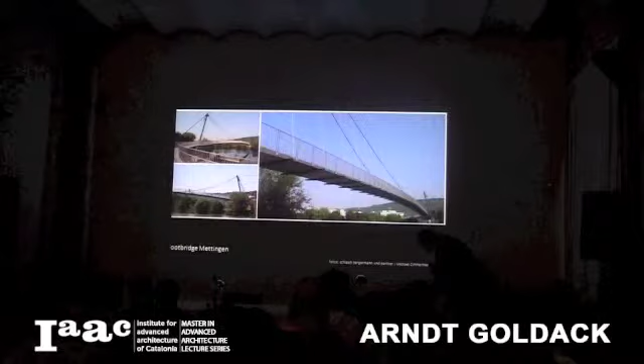And so the office of Schlaich Bergermann works a lot with footbridges and pedestrian bridges. On the other hand, they have very good experience with lightweight roofs, membrane roofs. You can see one of the earliest membrane roofs which has been built. This is the Gottlieb Daimler Stadium in Stuttgart. This is, let's say, the prototype of the membrane roofs.

And what you can see here is a very light structure with membrane here. You have a cable ring here, and these are not girders, these are only cables here, and you have a big compression ring here. In terms of structural engineering, you can say it works like a spoke wheel, more or less, but actually the point is that this roof is comparably light and easy to construct compared to other large span or wide span roofs for stadia.

And also lightweight structure, this is a structure in Stuttgart. This is a tower, panoramic tower in Stuttgart. And actually you can see that it is a kind of cable net structure here outside, where the stair is attached to this cable net structure. And to get the cable net structure to work here, because it's all in tension, you have to have here this post inside for the compression. So this is also something I would have in mind when I talk about lightweight structures.

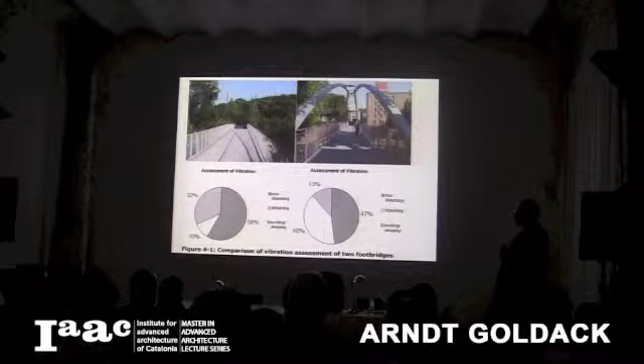And one of my explanations is that this bridge, I would say this bridge gives you a promise of stability. And the people are worried about this vibration here on this bridge. And here, okay, they say this is a lightweight bridge, it's slacky or wobbling, and so actually they don't worry about the problem here.

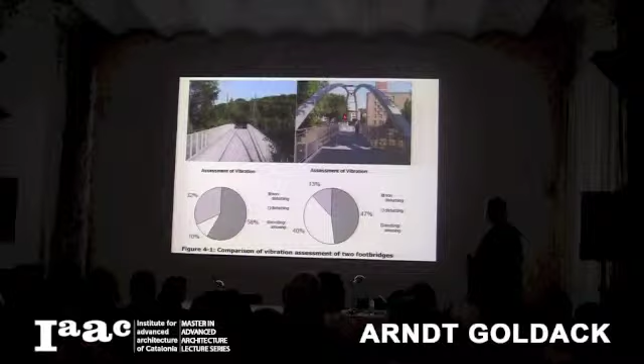And in this case, I will show you a video. You can see what happens here. This is a video. You see these four guys, they are walking in synchronous, so like in a stadium roof, in the stand, they are almost marching, and you can see here the amplitudes. Only 4 persons, no? But they have a trick. They have a metronome, and they know the natural frequency of the bridge.

And now look at the lady here. She tries hard to walk, and now she gets some problems here to walk. And now the bridge starts again to vibrate. She wanted to leave very fast. So this is a problem. It's structural engineering that you have to think in advance of this problem and think about comfort problems and everything like that.

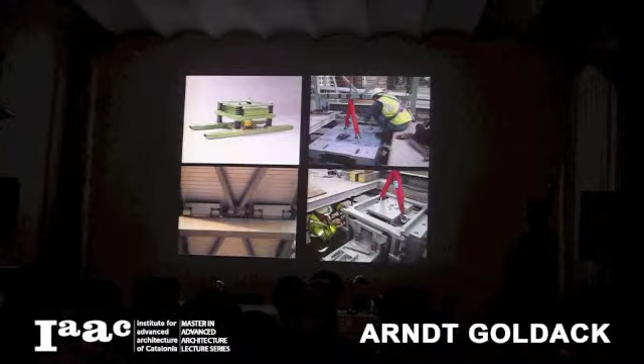So, very nice project. And if you don't want to have this large vibration, you have to think about damping. And damping is almost done by these tuned mass dampers. And you can see this is a very technical issue. You have some mass, you have a spring, and you have a dashpot. And actually, if you have done your design well, you find some place where to attach all these boxes.

And this is an example from the Millennium Bridge, where they had to put all these huge dampers here inside. And sometimes you can hide this, and sometimes you have the problem that you cannot hide it. And then actually the discussion with architects is to show the dampers or not to show the dampers. But in any case, it's a problem. If you don't take these vibration issues seriously from the early design, then you always get into problems.

And actually the worst scenario is that at least you will get a call by the owner and he's not happy with this bridge because of the vibrations. And afterwards doing this repair work is a really bad thing. So actually that's why we at Schlaich Bergermann used to take all the thoughts about dynamics and vibrations into the early design stages. That's a very important aspect.

I want to show you two projects now, a little bit more in detail. This first one is Sassnitz footbridge. This is at the Baltic Sea in the northeast of Germany, and you can see this nice footbridge here. And this is a cable stayed structure where you have here cables and the mast. And actually, in this case, we have to think about this vortex shedding, the wind-induced vibration, and also pedestrian-induced vibration.

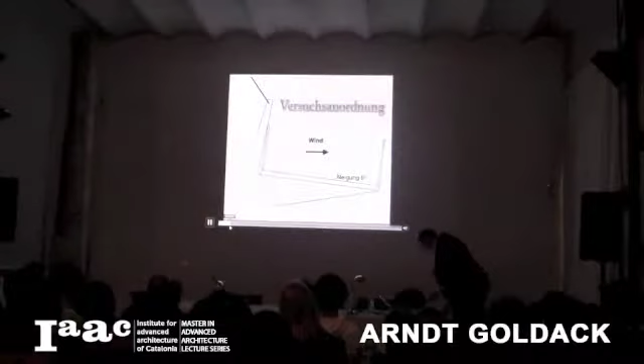Oh, sorry, I just want to show you the video. So, once again. So this is the old section where we have done the design; from the structural point of view, this is the section how it looks, what we need, steel plates and everything. And this is what the wind engineer recommended. He just added a small plate to the cross section, and the effect is tremendous.

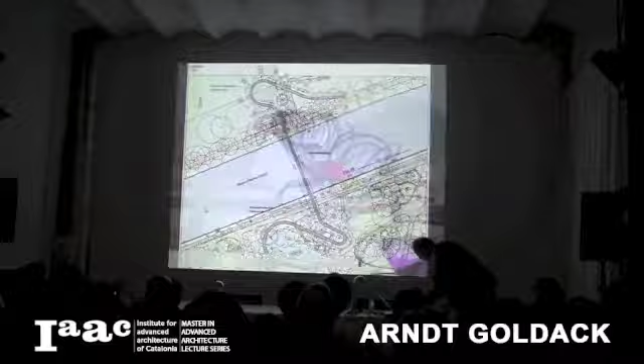Sorry, I'm a little bit here. Sorry. Once again.

So now, cross section again. The design from the structural engineer and the attached plates from the wind engineer. And now we put this model in the wind tunnel, and you can see here the rotor blades which generate the wind, and here is the old cross section, the new one with the plate, and now we are increasing the wind speed at different steps, step 4, and you see the old one starts already to vibrate.

And this is a full scaled model, so actually what you can see, this vibration is introduced by a wind which is a realistic wind at the sea. So actually just changing the cross section here has a tremendous influence on the stability of the cross section. And the next step is to check the dynamics of the pedestrians.

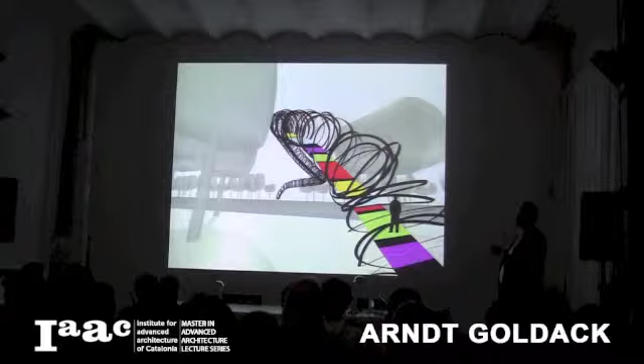You know, there's a toy with these spirals, and the question was if it's possible to build bridges with these toys. And the first idea looks like this sketch. So this is the idea of Tobias Rehberger, and now the question is how to make a structural concept for a pedestrian bridge. And we have a span of 70 meters.

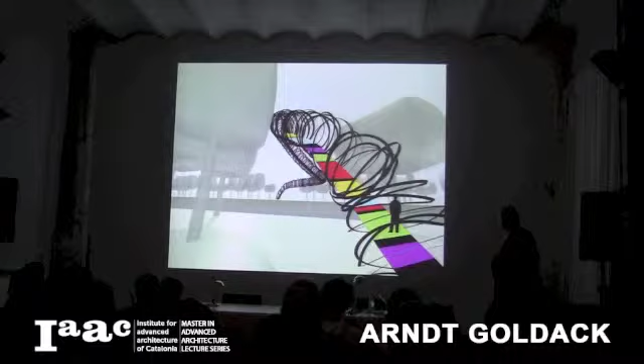And the question is now, if you take a standard beam bridge, you won't see anything here except the girder. You won't see these spirals here because of the structural height of the beams. So actually this is quite a challenging task for the structural engineers.

And what we decided to do is that we have here some special ramps, two of them, to get the necessary height to cross the canal here. You can see here is the canal, and the second ramp starts from here up to here, and this is a so-called stress-ribbon bridge.

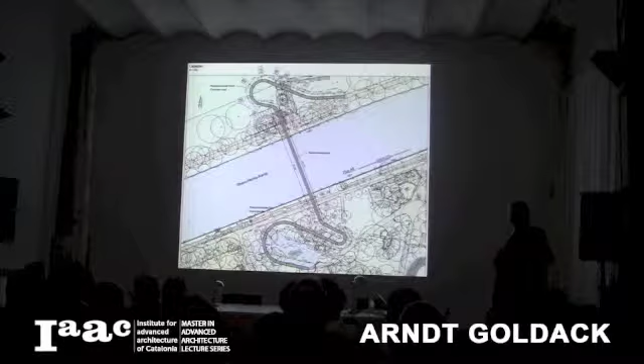The stress-ribbon bridge has a very big advantage. You can see it here in the cross-section. It works like a cable structure. You don't need a structural height for bending. You have here a cable with a certain sag, and you put the concrete panels on this cable-like structure, and we have a deviator here, and this cable runs from here to here, and here we have the backstay to anchor the tension force in the ground.

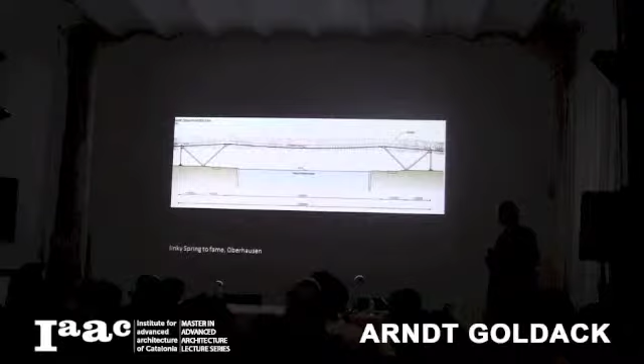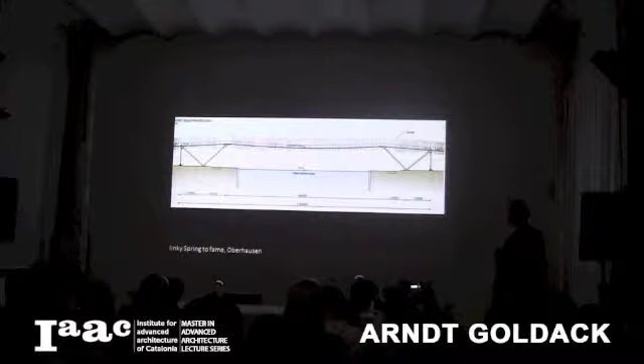And this is a very nice idea, because in this case you have only a structural height of 20 centimeters for a span of almost 66 meters. And you can see in these pictures now a very, very slender structure, but it's lively and it's lightweight. So actually we had to deal also with the dynamics and wind tunnel testing and everything.

And actually some pictures here. You see the spiral very nicely wrapped around the bridge, and no structural height or structural beam is disturbing the view on the spiral. And you see some impressive, nice photos here.

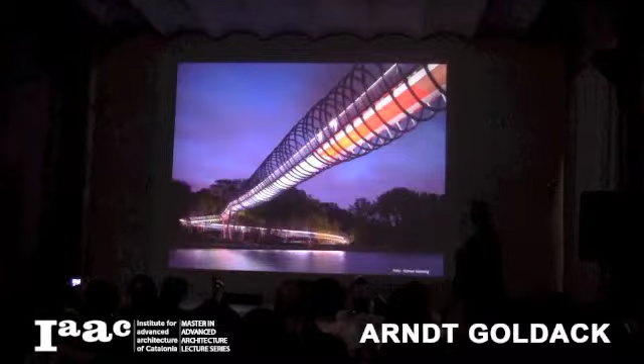And you can see here, this is the stress ribbon. We don't use cables for these bridges. We use a steel plate. This steel plate had a width of 60 centimeters and a height of, let's say, 30 or 80 millimeters. So it's a stress ribbon, not a cable. And these colors and illumination are very nice during nighttime.

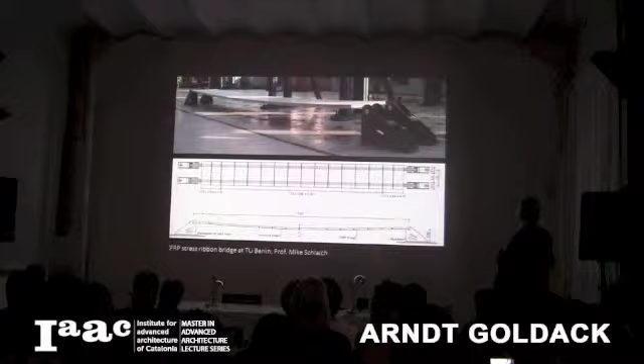And in our lab we have only a span of 13 meters built, but for our investigation it's very nice to do certain tests. And one of these tests is regarding pedestrian-induced vibrations. And look how this bridge started to vibrate. It's a real problem. If you want to have lighter footbridges, you have to think about these pedestrian-induced vibrations. And one of the solutions we try to find is semi-active or active vibration control.

And for this we have now attached, beyond all the posts and the hand railing and the carpets, some muscles here. What is a muscle? This is a special unit, I will show it later on, where we can introduce here at the defined measure some forces. And we have additionally now a central processing unit where we collect data from the bridge and give

commands to these muscles. And actually the idea of this muscle is that we have a valve here and some air pressure, and we can control the air pressure in this muscle here. And actually what happens if we inflate this muscle, it starts to contract and produces a tension force here. And what we do here is we introduce in the post some forces to act against the vibration.

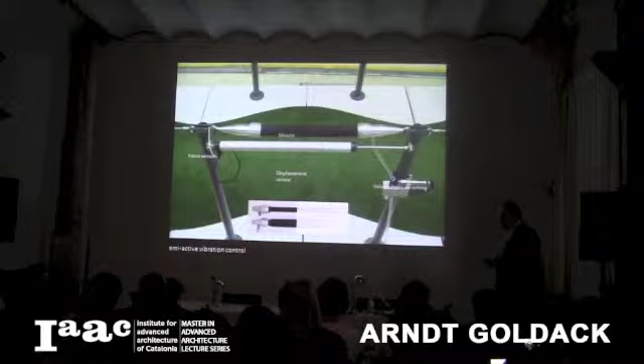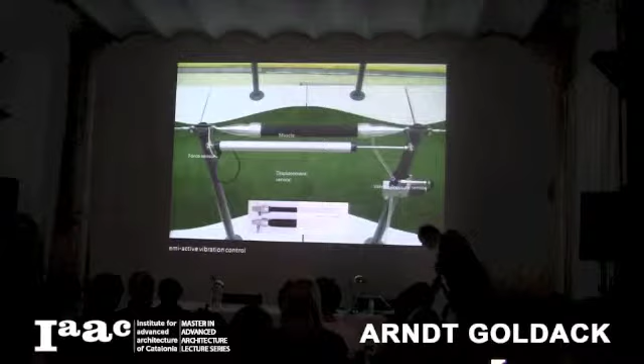And this is some stuff we need to attach also to measure the displacements and to know where the position of the muscles is. So all together we have this unit and the computer with all the algorithms. And what comes out is if you have a pedestrian walking on this small bridge, you see the bridge starts to vibrate. And now here the pedestrian leaves the bridge, then you have a free vibration, and it takes about 100 seconds that the bridge will not move anymore.

So actually you see this is a problem of damping. So this is a very low damping. And if we have this system running, you see you will only get up to 2 meters per square second. It's more than enough, 2 meters per square second, but you can see the effect of these muscles working against the vibration. Also, if you have here the free vibration, it's very short, only 5 seconds, and the bridge will not move anymore.

So this is one of our research topics, and I just want to show you one video how this will work without pedestrian. You can see we put some air pressure here in the muscles and you can excite the bridge, and this is the way how you can act against the vibration of the bridge. So this is some PhD work done here at the Technical University by Achim Bleicher, and he developed also mathematical algorithms to control the structure.

So, conclusion. Lightweight structures, I showed you they are elegant, and we try to minimize the use of material and therefore to build more sustainable structures in a true sense. But I have also showed that they have a problem because they tend to be lively and they can be excited very easily. But with special engineering efforts regarding dynamics, these problems can be solved.

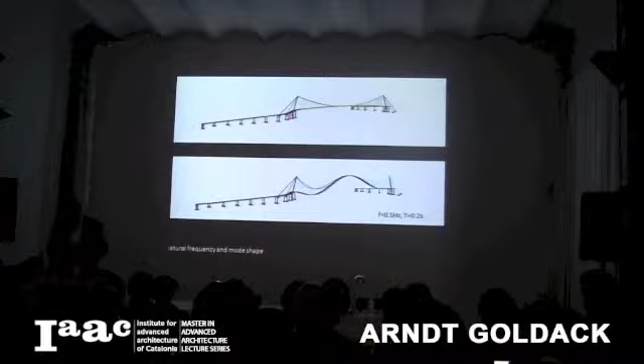From my experience in the design office, it's not clear and straightforward. It's always looking for better solutions and trying several options. And then the jumping guys at the end, yeah, to evaluate your calculations, very important.

Do you get the same type of problems with cable net structures or suspended net structures in general for towers? For towers, cable net structure. So, actually, these cable net structures, they have a lot of tension, and actually they help us to increase the natural frequencies. You know it from a guitar. If you put tension on the string, the tune will go up, and also the natural frequency.

So these structures are a little bit better. They have higher natural frequencies, and actually for cable net structures, roof structures, it's not that big an issue, because the wind excitation is not that big, and even if you have very lightweight structures and no mass acting against an acceleration, it helps because the natural frequencies are very high. So Schlaich Bergermann never had problems with these cable net structures up to now, or with these membrane roofs.

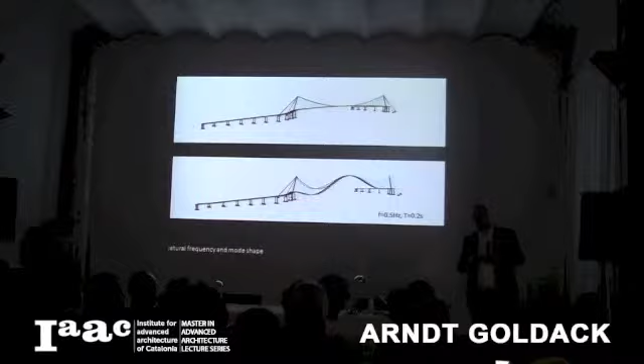How do they compare to compression structures? Much better, because they cannot buckle. That's a big issue. But to be honest with you, we have also in these structures, let's see, on this structure here, we have a tension element here, but we have also a big compression ring here. You cannot avoid compression, but reduce the elements with compression. That's the basic idea, because buckling is one of the problems we have to face if you have compression in a member.

I would like to ask, because I found very interesting, first of all, in your conclusion you are tackling the issue of materials as a solution to the different problems of lightweight structures, but as well, you have shown this example of the very thin ribbon of carbon fiber. And I guess, especially in research, but as well in the practice of Schlaich and partners, are you collaborating with material engineers, or do you work with new composite materials, trying to figure out new materials that could solve these problems in lightweight structures?

And if yes, which are the newest materials that you have come up with in order to work on those structures, especially composite materials, which I guess is the tendency now to solve this problem? So actually, we are not working with chemists or material engineers together. We have a cooperation with SGL Group. I don't know if you know them. They produce carbon fibers, and they are interested to introduce carbon fibers into the construction market.

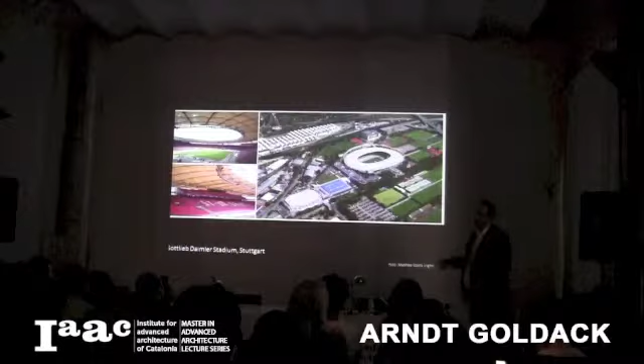They have a lot of carbon fibers for BMW and for Mercedes for cars, and that's a typical application for these carbon fibers, high-end products. But they also want to have some tension elements which can be used here. So there's a collaboration, and we try to develop not the material but the structural element of a tension element. Because it's not a problem to have cable structures or just a stress ribbon. The problem is the anchorage, or how do you get the forces from the stress ribbon, which is made from carbon fibers, to the other parts of your construction.

And I want just to show you the problem here in this picture of the stress ribbon bridge, but it's a little bit too slow here. Let's see. This picture. So the problem you can see here is not this kind of lamella. This is something you can use and you can buy. The problem is how to anchor this lamella, because in this anchorage you can lose a lot of bearing capacity.

So if you, for instance, take this lamella and glue it, you have only 10% of the strength of the original. So this is a very important part, and this carbon fiber company is interested in how to solve this problem. But they have a material lab, and when we go for a meeting and ask for a special structure or special material, they ask their material engineers. From Technical University Berlin it's a little bit complicated because not all of the institutes or chairs are working on this, so we are looking for cooperation. But in this case, we have more or less a development which is closed within a company.

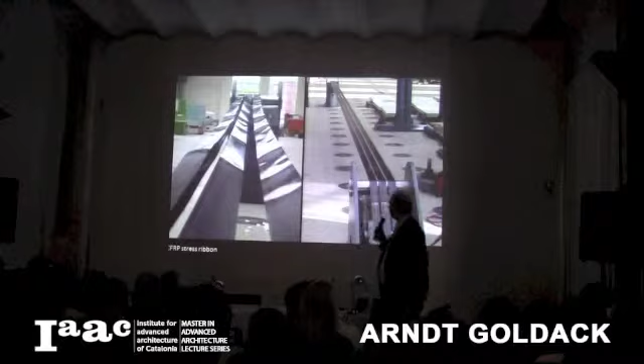Actually, you see two extreme points. One is the pedestrian bridge with an artist who said he wanted to have a great picture. And he knows that it's not easy to go over 66 meters or 100 meters. So in this case, we have done several designs and discussed with him. But he has not a concrete vision of a form. He wanted to have the idea of the spirals, and we can discuss how we can realize this more or less. So this is one extreme.

But actually this was a nice experience because they give us a very good idea or impression what they really want to have at the end. And we are trying to make a roof structure which comes very close to this idea. But they don't give us a form. And we developed 6 or 7 different options for stadia roofs. And this is always a kind of process, because then they play around with these different roof structures and see, okay, this is something we want, or no, we want to have a shape like this.

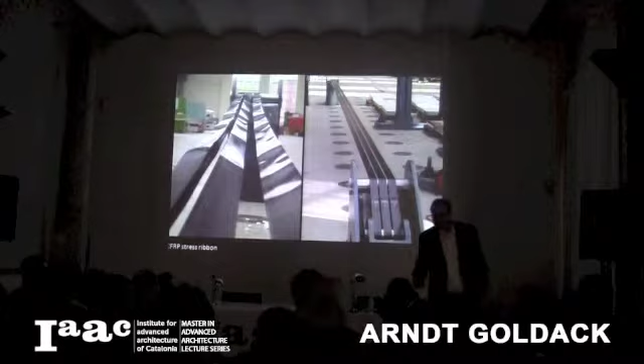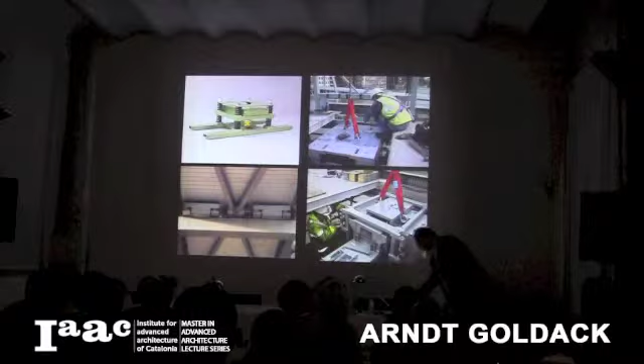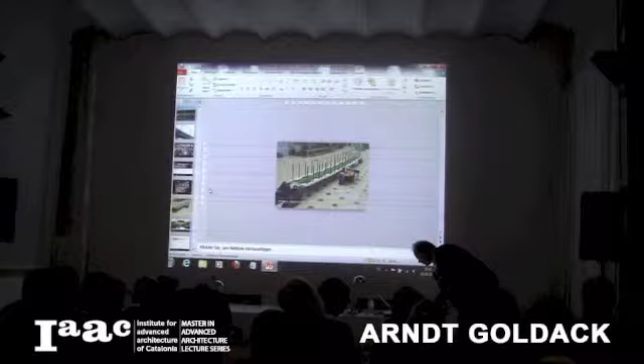The problem is, the first concept of the tuned mass damper is just to get a mass vibrating and acting against a dashpot which will dissipate energy. Let's see if I have these dampers here. This is a typical damper for vertical vibration. You put this on a deck and this mass will start to vibrate in this direction and act on this dashpot here. And if you are talking now about active vibration control, we are introducing forces. And the problem in this case is, I will show you the video again, this one here.

Now, think about different mode shapes which are possible for these structures. So the first one will be a bending mode which has a mode shape like this and vibrates up and down. So upper position, lower position, goes up and down. And in case of the tuned mass damper, I would put the tuned mass damper here in the middle where I have the maximum acceleration, and the mass damper will be excited in this direction and working in this direction.

But now the problem is, if you want to have another concept where you introduce active forces by this muscle, you have to think about how to introduce these forces, for instance, also for several mode shapes. You have the first mode shape is this, with one belly, and the second mode shape looks like this. Two sines here, one up and down, with two bellies. And in this case, you always want to use the same muscles.

So you are not sure that for this pedestrian bridge, the first natural frequency is excited, or the second, or the third. So actually, we take a lot more tuned mass dampers, and the basic idea is, if you, for instance, walk across this bridge and the bridge starts to vibrate in the first natural frequency, then actually you have something which is comparable to something which is bending. You will have here compression and here tension. So if it goes down, and if it goes up the other way around. And the idea is now to introduce forces acting against the vibration of the pedestrian.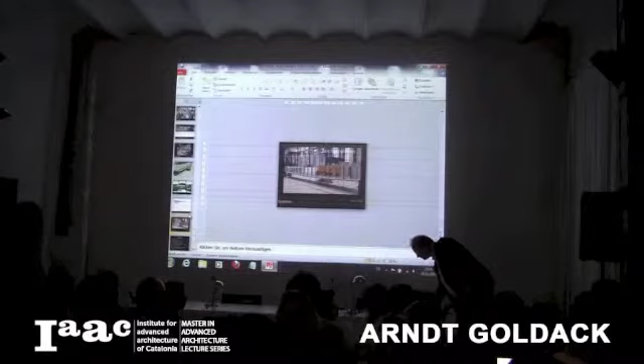I don't know if it's a full question, but as we are talking about lightweight, a light bridge, but then they have such big pillars, such a huge structure, which in some way is not so light. Is it possible, or are there cases where you can hide this according to the surroundings? If you build a bridge in the mountain, use the rocks as the structure, or a building close to it, because actually it seems like a fake light. It's like parents keeping a child. So that's it.

Good point. So actually, if you look at this bridge, it looks very lightweight from here to here, but you have these large abutments. You need a lot of mass or a lot of effort to anchor these tension forces in the ground. And this is one disadvantage of lightweight structures, because you try to stabilize everything with tension forces, and at the end of the day you have to anchor them somewhere, somehow. And there are several examples.

For instance, there's a famous Swiss engineer, how is he called? Jörg in Switzerland. He also builds stress-ribbon bridges, but he anchors them in the rock. Very efficient, very nice bridges, but in this case you don't have this rock. You have to have bore piles and anchorages to anchor these forces. That's right.